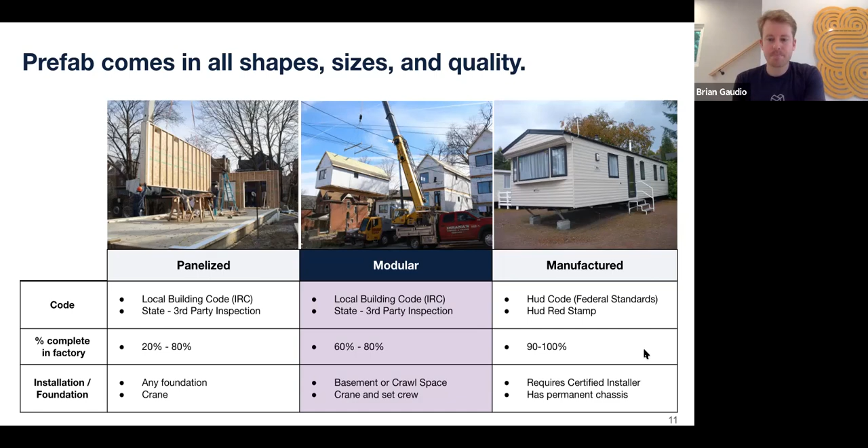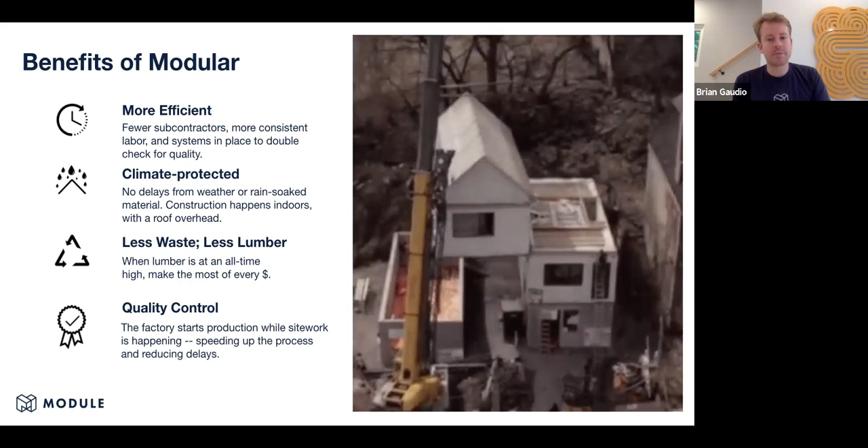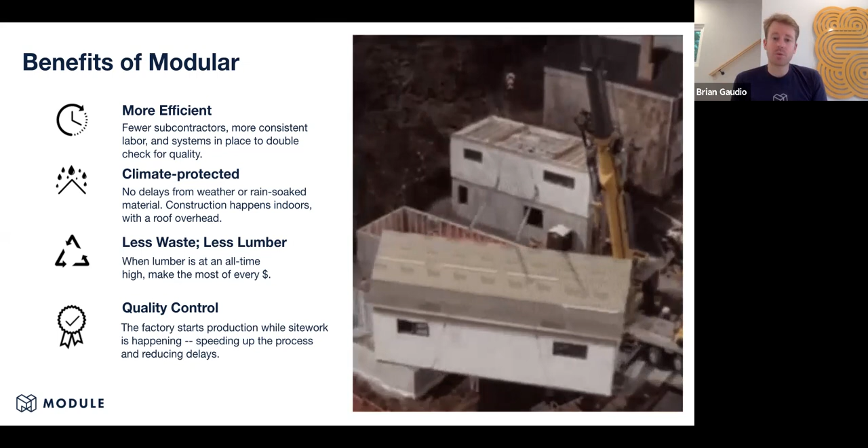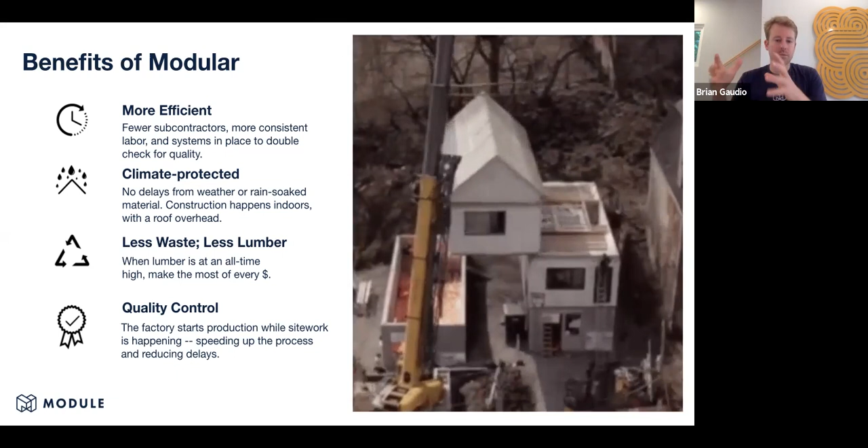So the benefits - obviously you're going to be able to build faster. That's really one of the main benefits. At the same time you're building the foundation, our factory can be building the actual houses themselves. And there are fewer subcontractors to handle - instead of 20 some subcontractors, you effectively have one super sub, which is the factory doing a large component of the project. If you're building in a climate with weather delays because of snow or rain, modular could be a great way to short circuit that, because you're building in a climate protected environment.

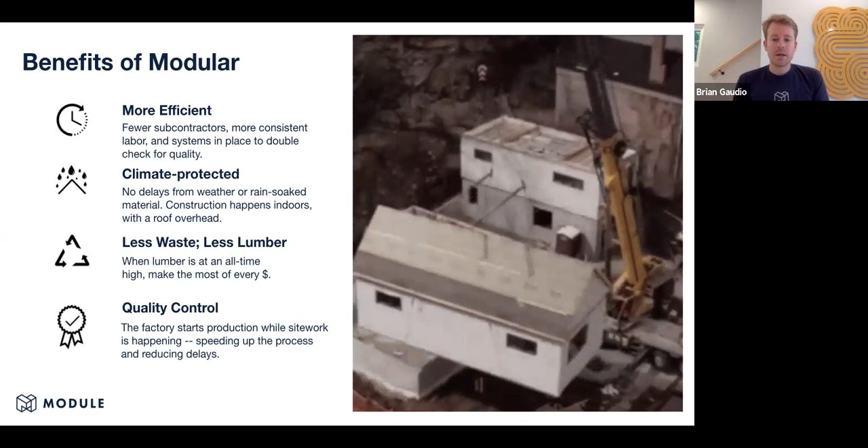And then less waste, from a sustainability perspective - we don't have a dumpster. If you look at that video, there's no dumpster there. That's because when you're building in a factory, they can control the waste and you have much, much less on-site waste. So those are some of the benefits of modular. It's not necessarily cheaper - that's one common misconception, that modular has got to be cheaper. We actually don't think that's the case on projects, generally speaking.

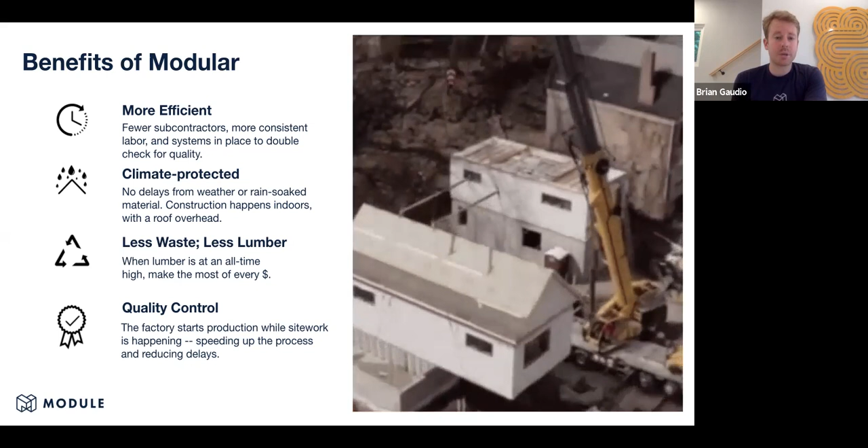Black Street. So this is a project, this is where I'm sitting today. This was a project we delivered in 2020. It was 4 units, and there are 3 structures here.

This was a mixed income housing project. The unit on the left was affordable for-sale housing, sold to an 80% AMI buyer or below, 2 beds, 1.5 baths. The house in the middle was market rate, 3 beds, 2.5 baths, with off-street parking. The house on the right functions as our show home and sales office space. It's actually a duplex, so you can live upstairs and rent the bottom on Airbnb or to an elderly family member or something like that.

So a 4-unit project, mixed income, in Pittsburgh. Why mixed income is important: for those in the affordable housing world, the previous strategy was to build concentrated large public housing towers in particular areas of the city. What that does is concentrate poverty. With mixed income, you can provide more amenities to the affordable buyer, because they might be in a neighborhood with a better commercial district or more neighborhood amenities than an area with a concentration of public housing. That's why we did the project, and why we think mixed income housing is important.

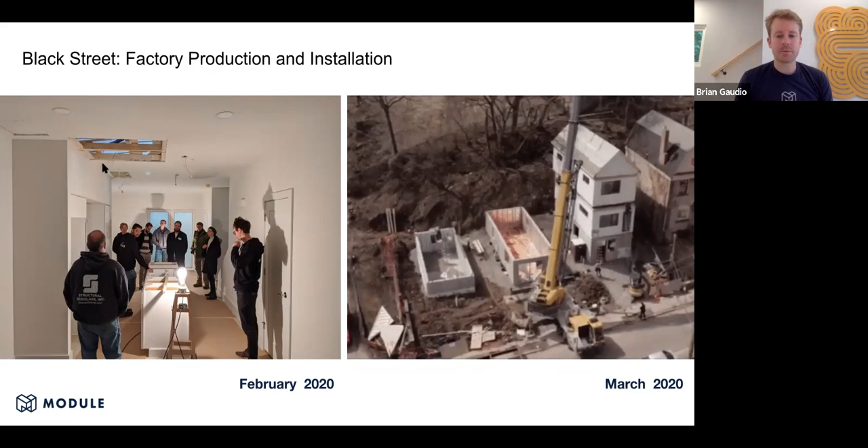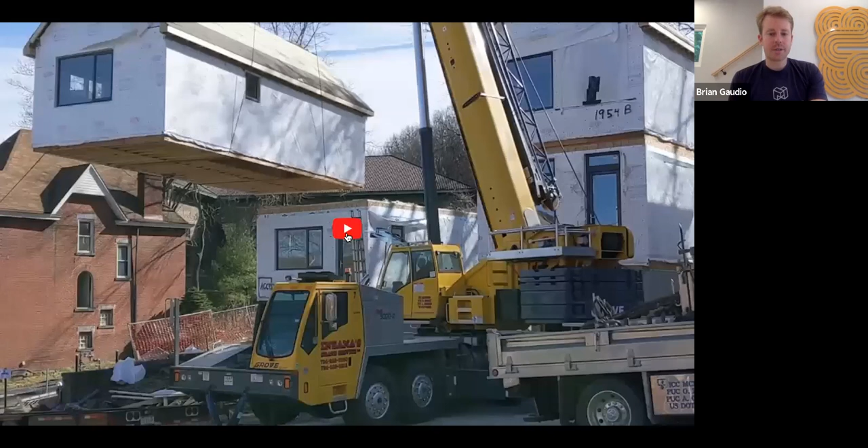This hole in the ceiling is actually an access panel to connect the 2 boxes together once it comes on site, which you can see on the right here. This is a little video where Ankur can talk through the process, with some good footage of the project generally speaking.

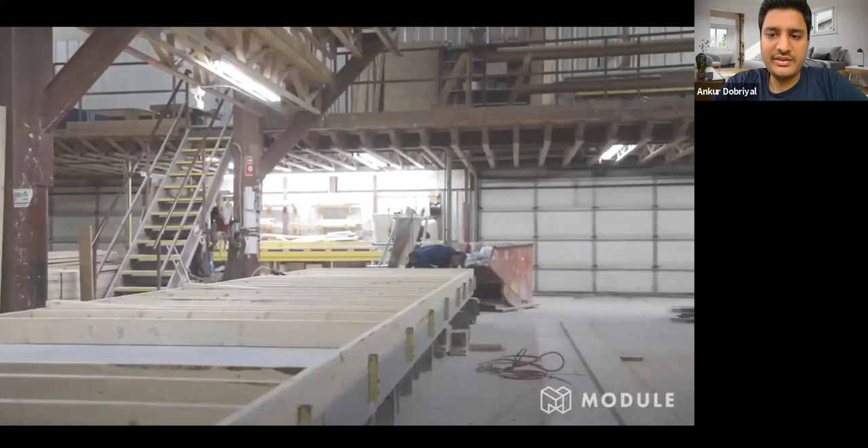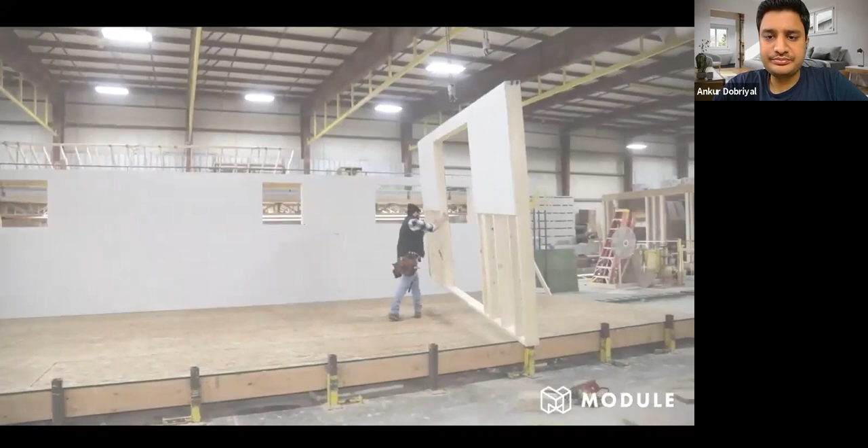As you guys see on the screen, some footage from the factory. The guy is working on a floor. You'll see different stations the factory has. That's the first station, where the structure basically gets built. You can see the walls being lifted and placed on the floor. All the exterior and interior walls get done at that station. What also gets done is the roof or ceiling, depending on which floor you're in. You can see a roof structure being placed on that house. At that point, the structure is complete.

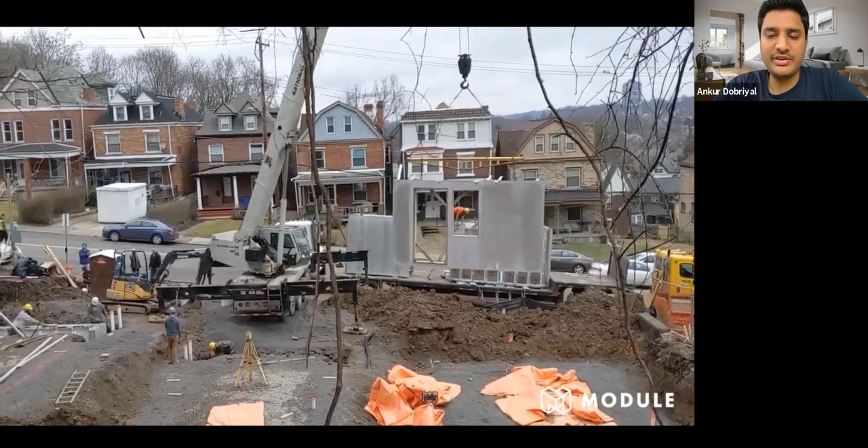This is basically a shot of the foundations being installed. We do a Superior Walls foundation, which is an off-site built foundation. The biggest advantage is we can do it throughout the year, so we don't have to wait for good weather to pour. This set in the video is from February, probably 30 degrees outside, in the middle of winter, and we're still able to do it.

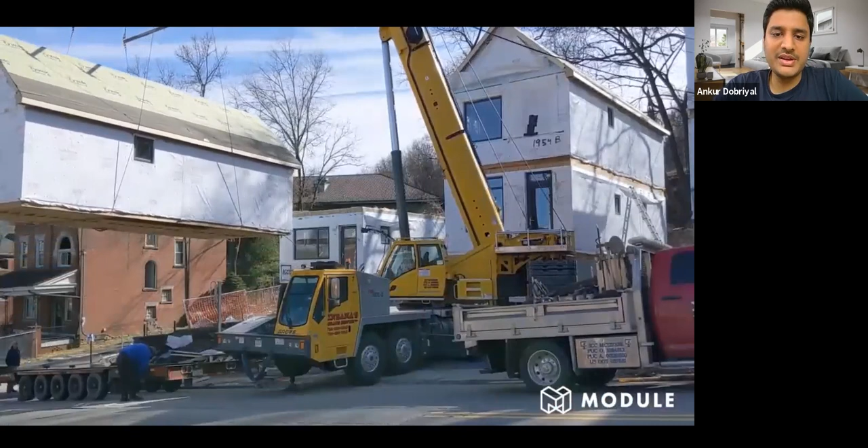This final footage is from when the boxes, or modules, are being set. You can see the roof is pretty much complete as the top box gets lifted and placed on the first box already under there. We had a crane on site and some traffic management. But we were able to do this without really blocking the street, which was good and didn't cause a ton of interruptions for the neighbors.

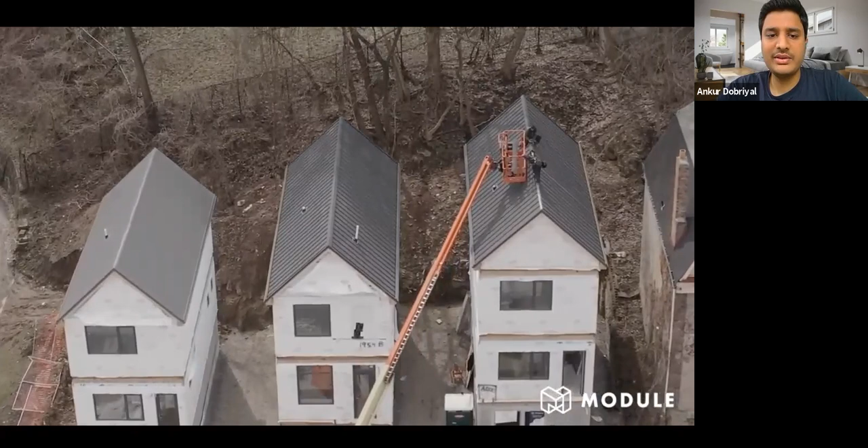So essentially what you see on the screen took us 2 days to do. In total there were 7 boxes. We have metal roofs on all these houses, and I think roughly we could set 2 or 3 houses a day.

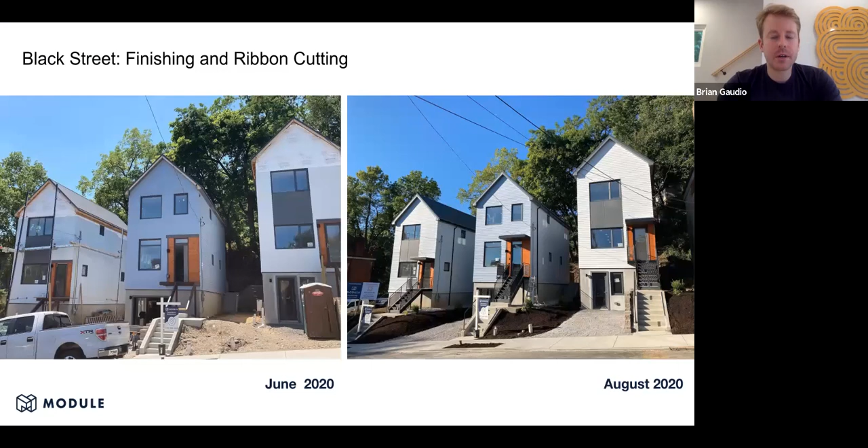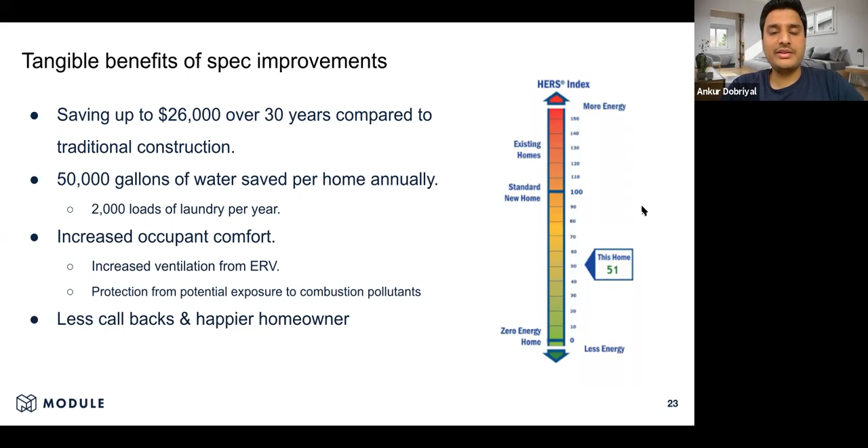So we'll go through a couple of things to consider if you have an infill site or a piece of land you're trying to evaluate. A couple of basic first things to consider: will that site support modular installation? Boxes are going to come on a truck, so you have to think about the route from the factory to your site. And once they're on site, there's a lot going on - a crane, a set crew, and traffic. So those are important things to consider.

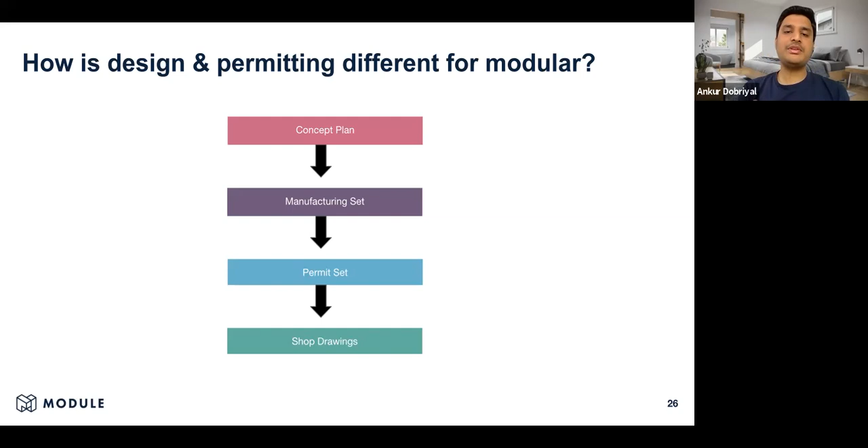So how this typically works is we have some standard concept plans - you guys can go on our website and look up all the standard plans that we have. So we have a stage where we do all the concept plans. The information that goes into these plans we've accumulated over the past 2-3 years, so our team has a good understanding of how the factory works. That's where we start.

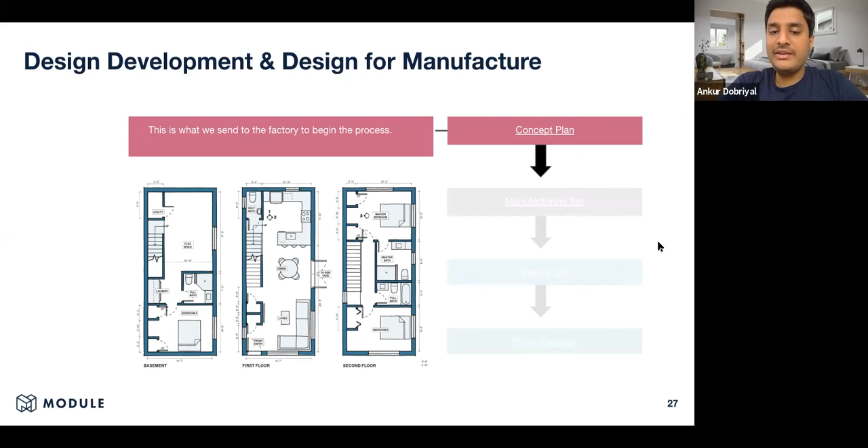Once you as the customer sign off on the concept plans or pick one, we go to the next step, called the manufacturing plan. This essentially gives the manufacturer or factory the ability to draw our concept plan in a way that the state permit people would understand, since that's who's stamping the drawings. They also check for any issues with the code or with the assembly line that might occur. So it's a pretty small process or timeline for any of our standard plans, because we've already gone through those exercises.

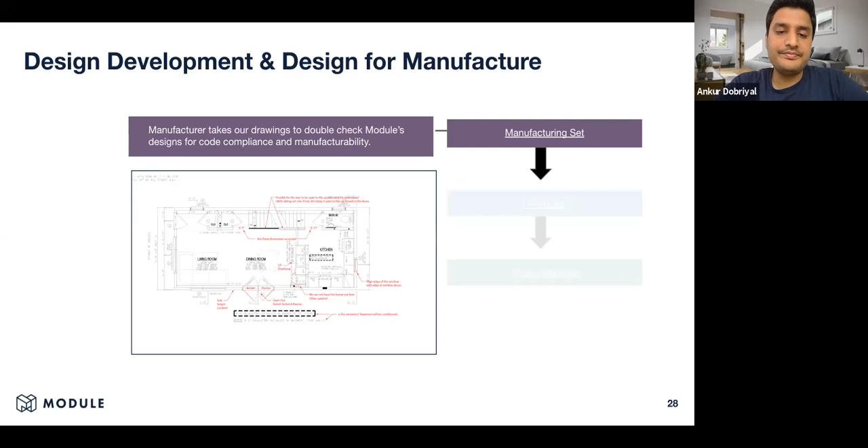So manufacturing plan would be the next step. Once we sign off on the manufacturing plans, we go to what's called a permit set. This has all the information needed by the state and third parties to stamp those drawings. Once we have state-approved drawings, we submit to the city like any other project. Any accessory structures—porches, garages, decks done on site—are added as supplements to this permit set. We'll work with our architect partners or a local architect you're already working with to incorporate those accessory structures into one permit set and submit it to the city.

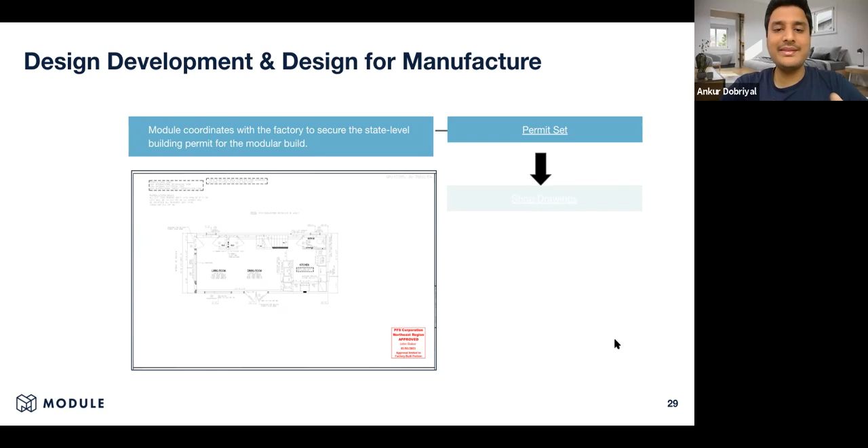Finally, once you get permits, you're ready to begin. You place deposits with us. The next step is shop drawings, which is essentially what exactly gets built. These shop drawings form a directive for the factory workers building the houses, and will also serve as as-built drawings for when the houses are delivered. This is the set that you, the homeowner, will own.

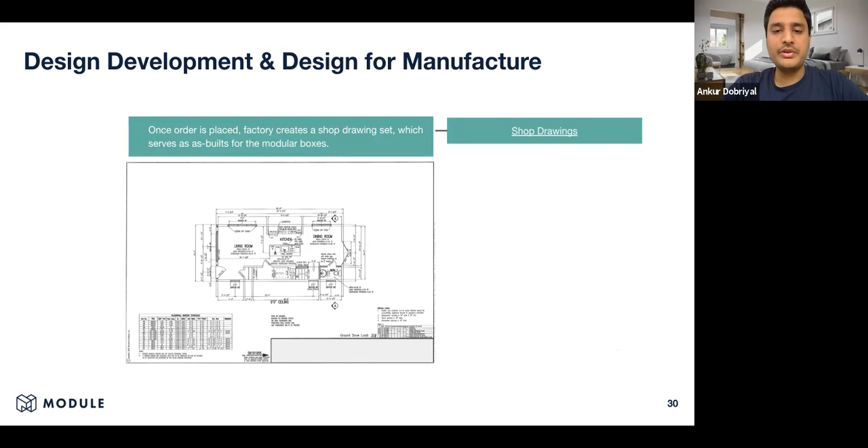What's really great about using modular as a delivery method is that you get pricing estimates much more quickly if you use one of our standard designs than if you were to go from scratch with an architect. So you can figure out whether or not a project pencils much faster with us.